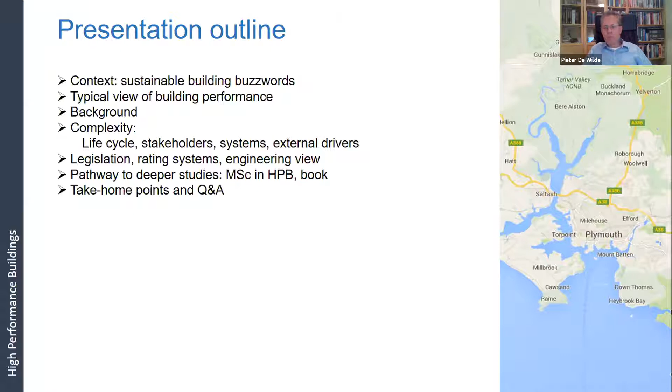I will then make a distinction between legislation, rating systems, and what I call the engineering view, and give you some pointers to work we do at the university, and pathways if you want to know more about these things, where you can learn about them. I'll end up with take-home points and open up the Q&A. So, set you in the scene for the bit there.

But then we come across a range of other names. Things like eco buildings, passive house, zero energy house, or plus energy house, or we can talk about net zero emission or net zero carbon, autarkic house. Then we have the BREEAM and the LEED certified buildings, green buildings, sustainable buildings. It is a very long list.

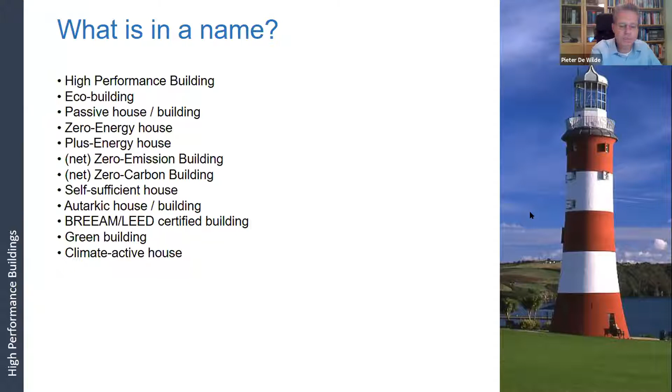And all these things imply specific focus areas. There's quite a bit of uncertainty often amongst my students about what is what and how we draw the boundaries between those things. So if we talk about high performance buildings and building performance, the dominant view seems to be one that somehow relates to sustainability, energy efficiency, and thermal comfort.

So things like daylighting, natural ventilation, use of renewable sources, water conservation. And because it's an American building, it's all normalized into US dollars, and what they're proud of here is an energy cost that is $0 per square foot. So that is something we see a lot when we talk about building performance.

If we have the discussion within our groups at CIBSE or at the university, a lot of that boils down to energy efficiency and things like the certification scheme. You all know these things that we see on white goods, but we also have them in buildings now, and we have long discussions about what the energy performance certificate is, what the display certificate is, and whether there's a gap between the two. So that is where a lot of the focus of our work goes. CIBSE also run a building performance award, and again it tends to focus in this area.

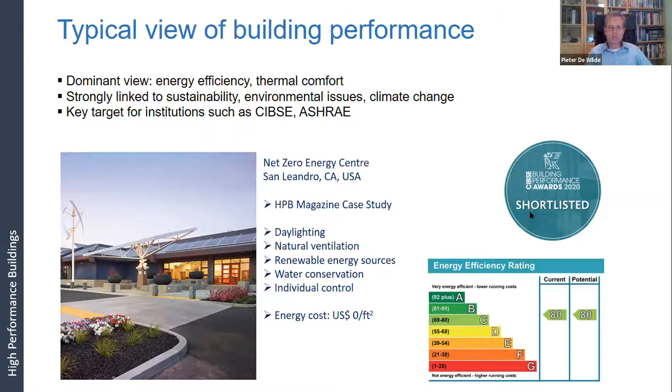If we look at the background of building performance, actually building performance has been in the interest of humanity for a much longer time. That's not a recent phenomenon. If you go to the very first buildings ever built, that is about creating shelter against the environment. People are interested in which building keeps you better dry or keeps the animals out more safely than another. So that has always been in there. But originally all of that goes into a concept where architects and other people work together—the concept of the master builder, one person in charge of everything. We have this evolution of design and the craft of building houses over the years, and performance is part of that.

Performance actually comes to a specific realm of its own already very early on. If you look at the timeline of performance, very early on you have the Hammurabi Code, 1700 years before Christ in Babylon, where there's a law that says if a builder constructs a building and that building falls down and kills the occupants, then that builder shall be put to death. A very strong statement about building performance, what the building has to do, and also the very harsh consequences if you fail to meet that performance standard.

So that's a warning—if we complain about Part L regulation, it's been worse in the past.

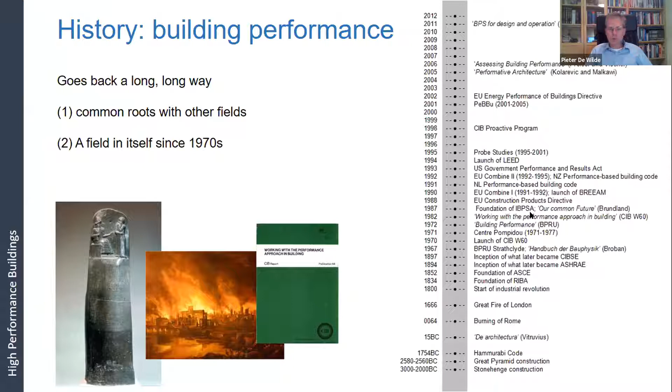Like I said, the initial take of most people is to say building performance is strongly related to energy, thermal comfort, maybe a bit of structural lighting, ventilation. But one of the things I really try to champion with my students over the years is that there's many more. I did quite intensive research on what aspects are in there.

I can reach behind me and grab my thick book that I wrote on building performance. One of the things you find in that book is an appendix that lists almost 80 different things we should be looking at when we talk about buildings. For instance, olfactory comfort—what you smell in the building—or burglary protection, or how you find your way in the building, or how you keep vermin or pests out of the building. All these are things we can measure that actually have to do with the performance of buildings, so we should not forget those.

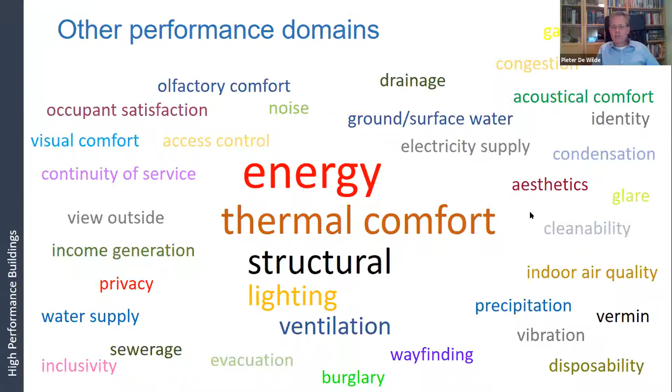But all of this also brings us to quite a bit of complexity. One of the first things is you have so many aspects on the table, and it's like a spider's web—if you pull on one side, everything starts to move and everything is interconnected. If you make buildings more energy efficient, that might have consequences for the fire safety on the other end. If we think of Grenfell, an effort to make a building more sustainable and energy efficient later on had very nasty consequences for the safety of the occupants. In fact, that spider web—every string you touch is related to the others.

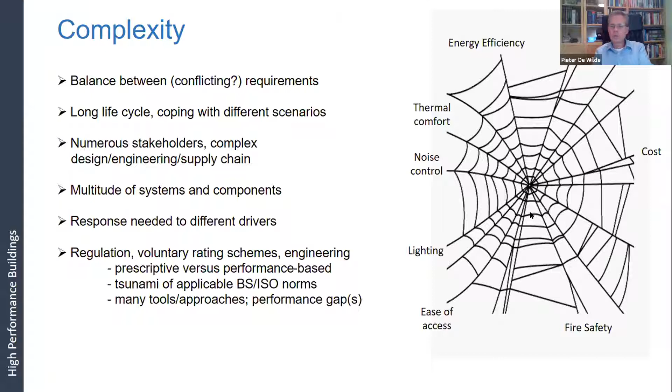Then we have to deal with other complexities, and I'll talk about that in the next couple of slides. We have a long life cycle, coping with different scenarios. We have very many stakeholders in the project, quite a lot of factors we try to respond to. And then we have these regulations, and we need to deal with those and make sure we handle them right.

So if you think about something like climate change and a warming situation, more extreme weather events, our buildings are likely to face that, and that makes our design, our engineering more complex.

We also have to take into account that if we try to do that engineering and design for the future, we have to deal with things like facility management, renovation and retrofit. These are all things that happen throughout that long lifetime, but also are hard to predict. It's very hard to say right now, if you build a building, let's say on the university campus, how good the facility management will be in 20 years down the line. When can we expect the renovation? When can we expect the retrofit and a new heating system to be brought in? It makes it difficult to do our job.

At the same time, the high performance building of Stonehenge - I like to show that to my students and challenge them to say, okay, you design a building that is supposed to last for 3,000 years, and you design a system to bring in stones from Wales to make a monument in Wiltshire, and actually have something related to where the solar position is. That is a nice challenge.

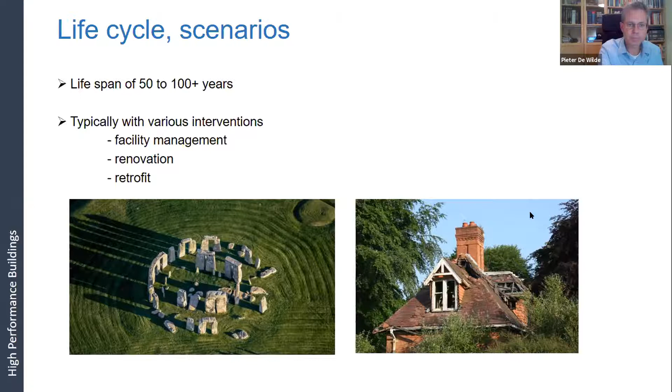Then we have the complexity of the stakeholders. There's a lot to be said about the different people involved. And if you work in the industry, like probably most people on this call today do, we have to deal with a whole range of people - the client, the design team, the contractor, the occupants later on in the building. That is already complex, and we need to take care of all of them and make sure there's good communication.

But if we start thinking in more detail about that, you start to realize that for a building like a university building, the tenant is actually an organization with a whole range of people in there. There's a dean, a head of school, a head of department, a secretary, a large number of staff, a large number of students. That becomes a complex organization in itself. And the communication from that organization with, let's say, the architect and the engineers who develop the new building is a specialty in itself. There's also risks in this.

The more you read about that and follow the news, the more you see that stereotyping is something difficult, and that happens all the time. Especially if we say, well, this is the way an architect thinks, this is the way an engineer thinks - then actually we're kind of fooling ourselves and often making mistakes.

An example I like to talk to my students about is, for instance, Calatrava, who's done some very nice building design. I like the railway station in Liège in Belgium, which he designed. It's really on the interface between structural engineering, architecture, and actually, in a way, sculpture in itself. So all those boundaries then become difficult, and we need to look into that.

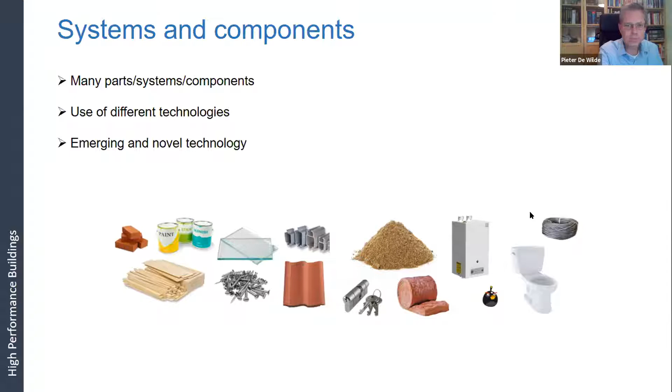Then we have our external drivers. And I've had for a long time discussions with colleagues where I remember some heated debates that climate change was seen to be the major driver that we need to respond to. And in a way, that is true. But in another way, it's not true.

So the current situation with the pandemic suddenly puts climate change into a different category, and everybody's now focusing on how we cope with COVID-19 in our buildings. Might be if the vaccine works that we can go back to worrying about climate change. There's also people that actually see some connection between what we do to the wider environment and the emergence of things like COVID, but it's a different challenge for buildings. I like to point at some other of the challenges that we have in there.

So climate change, warming situation, and more extreme events is something that I researched in the past, and that's definitely an important one to look at. But there's other stuff, yeah? So for instance, peak oil. If we keep using fossil fuels, then long before we get out of fossil fuels and we don't have any left, the price goes up. And that is an effect that we will see much earlier than us running out of fossil fuels.

One to think about. Clean water is becoming more and more of a problem. University has done quite a bit of work on microplastics in water and all the health effects that might have. Yeah, it's another one to worry about. And what the construction does in that sense is something that we should explore.

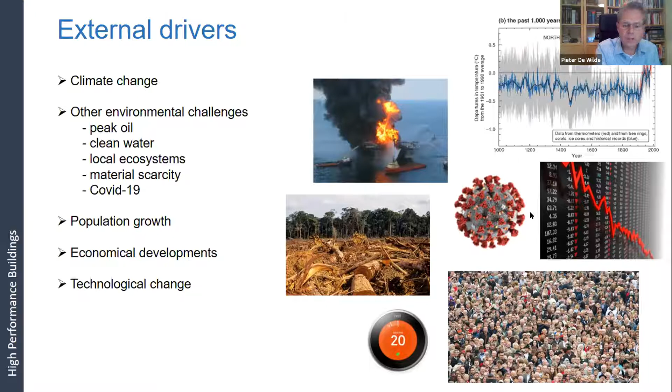Now, if we then take that into how that sits in the industry, and hopefully the next two speakers will follow up on some of this. But we start, of course, with building regulations, where the government tells us that every building needs at least a certain lowest level of performance. What is interesting if you look at building regulations is that originally building regulations gave a list of solutions. So if you were to build in a certain way, if you make a detail as specified by the government, you are okay to build.

In the 1980s, there was quite a bit of discussion where people wanted to move from what is called prescriptive regulations to performance-based regulations. Performance-based regulations lets go of saying this is the good solution, if you do this, you're okay. It just says if you build a building, for instance, you should make sure that your energy use per square meter is not higher than a certain threshold. And how you actually achieve that, we leave completely open to the designer. As long as you meet the performance, you're good.

That was interesting, and there was a lot of work, for instance, in the CIB, the International Building Society, to get that to be adopted across the world. But then you find out that for some areas, it doesn't work as easy as that. So the full swing to completely performance-based regulation has never happened. What you see in practice is typically a mix where some of the regulation, like the energy efficiency, is performance-based, but there's other areas where we still prescribe solutions because that works.

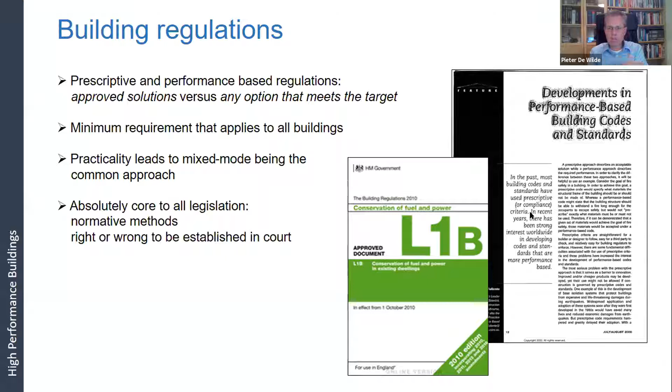One thing to keep in mind if you talk about regulation is that regulation is something that needs to stand up in court. So this needs to be a black and white approach. You need to be able to say, if you designed the building, did it meet the regulations, yes or no? And you go back to an example like Grenfell Tower. People at the moment can go into court and you can say, can we blame the architect? Did he do a good design? Can we blame the consultant? Did they do a good job? How about the contractor? Did they meet the specifications? It needs to be black and white. And that is what's always there in a legal context.

One of the things you get into if you look at all these legal documents is also, it is something that does your head in. So I'm a professor in building performance analysis. It's my job to look at these things. So one of the things I did about a year ago was go into the university system and download all the building norms that I could get my hands on. And we have a system called the Construction Information Service, where you can get all the British standard, European and ISO norms and download them to your machine, and you can start reading.

I never got much further than making a spreadsheet that has the names and the codes of these norms. And then, well, as you see, this screen ends at 1200 something, and that's just in the middle of my spreadsheet. There's a long, long range of codes and norms that applies to buildings. So actually getting all of that to be integrated in a design and meeting all those regulations that are out there, that is a really steep uphill challenge.

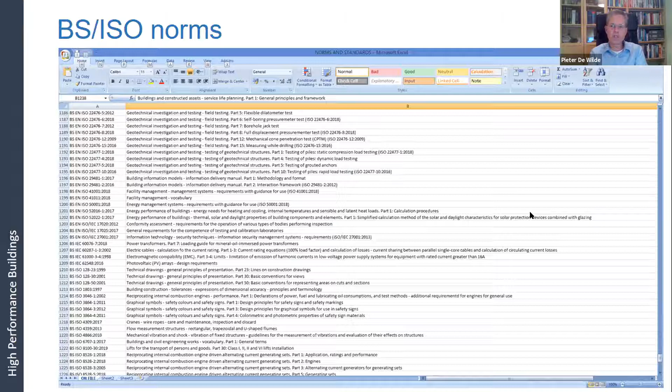Then beyond that, we have voluntary rating schemes. So you might all know BREEAM, the Building Research Establishment Environmental Assessment Method, but there's others around there, right? So the US has LEED, we have Passivhaus. I think there's a talk on Passivhaus later on. One of the new kids on the block is WELL, which is more on the health effect, but we've got things from further afield. So we have in Qatar the GSAS system, the Global Sustainability Assessment System. We have CASBEE in Japan. We have Minergie in Switzerland. We have NABERS in Australia, and that list goes on.

Typically, those voluntary rating schemes, they're really driven by the industry, and they help to increase sales and prestige. Yeah? So if you can say my building is LEED Gold certified or LEED Platinum or BREEAM Excellent, that is an argument that allows you to set the building into the market and claim some brownie points.

If you look in more detail in how you achieve that rating, then typically all those rating schemes are based on gaining some points, getting some credits. And some of those credits are related to performance, but there might also be points for things that are actually not related to building performance. And that is where things start to diverge from what, in my perception, is a high performance building.

So for instance, you can, in many schemes, get extra points for using a certified assessor in your design process. That says something about the process, but not about the building. Sometimes you can get credits for being close to the railway station, for having a bicycle shed. That's not necessarily a building performance thing. That's just something that you can score, right?

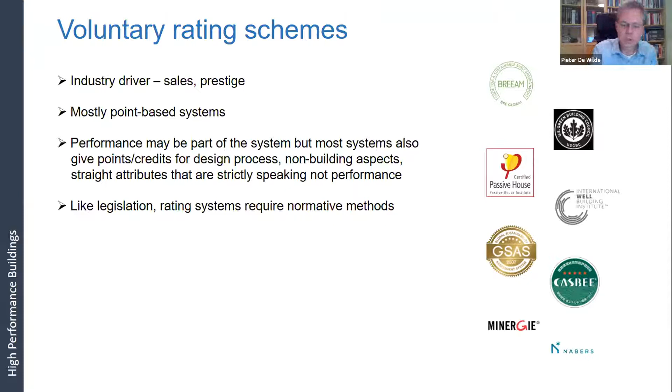Then we have the engineering perspective. And if we do engineering, then typically we are aware that there's uncertainties and we predict things, but typically with an error margin. This also leads us to wanting to say, well, all these aspects, so Peter, you talk about 80 different performance aspects. How do we handle that?

Well, the first thing is that we need to be able to measure it. Yeah, so we have the quotation of our famous Lord Kelvin in here. If you cannot measure it, you cannot improve it. So if I want to do high performance, then first of all, I should measure performance and then be able to say, am I in the high performance bracket, yes or no?

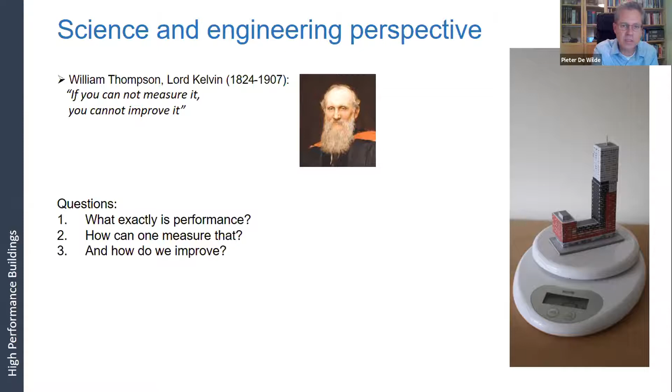But that leads us to further problems, because then we need to define performance, and that's not an easy one. We also need to talk about how we can measure it. And then we need to decide in a design process or a re-engineering process how we can improve the performance. Not easy things. If you're interested in that, I will just point to the masters we have where we talk a lot about these things. But here I will just keep it relatively simple.

And I will say, okay, performance is something that has to do with how well the building does the functions that it has. So it needs to be energy efficient. It needs to provide fire safety. And how well the building does that, we can actually measure with 4 main approaches. The first is the good old physical measurement. Think about Newton and the apple, and we measure how quickly it falls and what forces are in there. And we can use that on buildings as well and do measurements.

Problem we have is that buildings are large and expensive, and bringing a building into the lab is something that we actually only do for components, right? Nobody takes a full Grenfell Tower into a fire lab. Maybe a part of the facade, but not the whole thing. So for measurement, we're often looking at buildings in their context, but that means that we have not full control. So we don't have full control about the climate, we don't have full control about the occupants.

The second approach we have to quantify performance is computer simulation. That's where we build a good model in our nice computers that we all have, and we try to predict how performance would be, assuming that we make no errors in physics, the math, and in the coding. Yeah? If we do it all right, then we can actually look at all kinds of variants in the building, compare them under identical scenarios, which is great. And we can also predict performance of buildings that have not been designed yet, which is also a good thing.

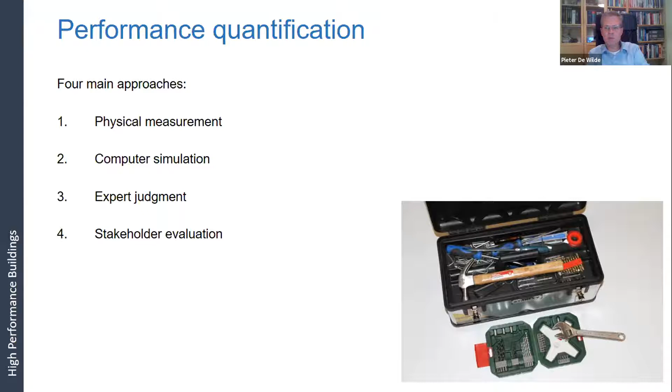But one of the problems we have there is that the judgment of people often is subjective and has noise in there. So when I ask my students whether their room is comfortable, if I do that in September when they just start the new lecture term and they're all excited and they're in a good mood and they just come from holiday, then we'll have a different perception than when I ask them at the end of term when the exam is near and they're all stressed out. The conditions in the room might be the same, but what they make of that building might be dependent on external stressors. So that is one of the complexities we have in that field.

So like I said, building performance, something we want to measure, but then what is high performance is where we actually take a building and compare that to other buildings, to the peers. Yeah, that's one of the things, but we also need to look at what experiment or what loading we have on that building. So the same building positioned in the relatively mild maritime climate of Plymouth, if I take that same building and put it in the top of Scandinavia where there's a much harder winter, then that same building will have to work harder to maintain a thermal comfort in the winter conditions. So we also need to take that into account.

If we look at how that building performs related to the peers, then that instantly also means that if we have high performance buildings, then we probably also have low performance buildings, something that is not so good. And we probably need to look at those. And there might also be a middle group of regularly performing buildings. Where you actually draw those lines is something that has not been debated in industry as far as I can find. But you can have a discussion whether high performance building is your top half, your top quarter, or just your top 10%. And that has to do with where we want to draw those boundaries.

It's also at odds with things like rating systems, because in a rating system, in theory, once you've defined what a BREEAM Gold building is, all buildings in the world could do that and all be in line for a BREEAM Gold award. Then that would reduce the usefulness to the people that built those buildings. But because it's a normative system, once you've drawn the boundary, it's in or out. For high performance building, that is not defined that way.

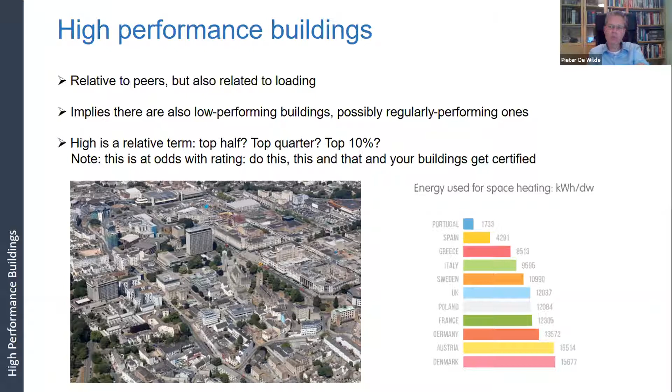At the university, we also do other stuff. We have an MSc that has exactly the title of my talk - Master in High Performance Buildings - that is accredited by CIBSE. So that's my CIBSE hat on, as well as my university hat.

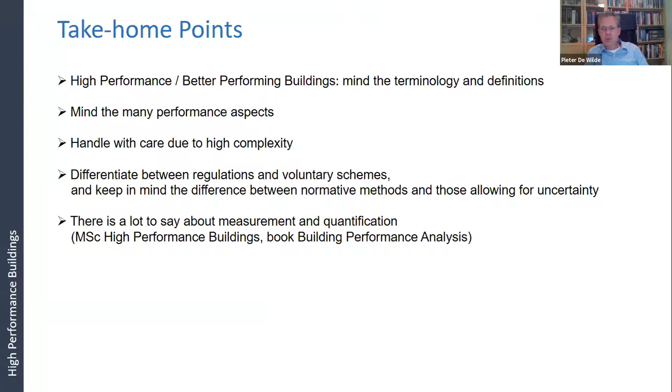I'm going to round up now, I see we've slightly overrun. A couple of things to keep in mind: with high performance buildings, mind the terminology and definitions, be careful especially if you use other terms. Mind the many performance aspects, handle the complexity, differentiate between regulations, voluntary schemes, and the engineering view, and keep in mind the normative aspects and those that allow handling uncertainty. There's a lot more to be said about these things - that's why we teach this at university level. I'll leave it at that and hand it back to Miles.

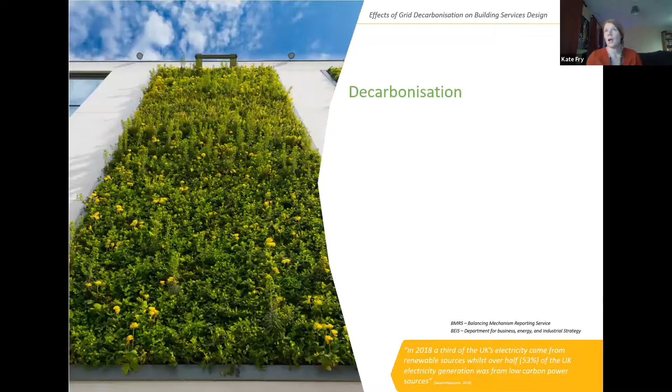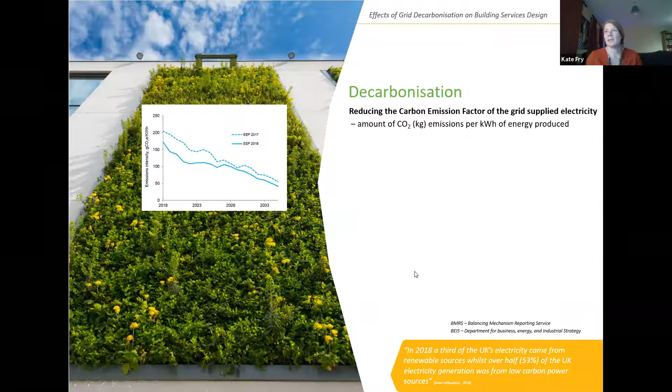What was really interesting this year is during the first COVID lockdown, from March to June, there was 0% coal usage feeding into the grid. That's the first time since forever that's happened. But we are unfortunately now back to using coal as demand has increased since the lockdown.

There are some other technologies being used in the grid: pumped storage, interconnectors, which is essentially energy from abroad, and carbon capture, which is a big buzzword at the moment, which essentially is capturing that CO2 so it doesn't go to atmosphere, further decarbonising the grid.

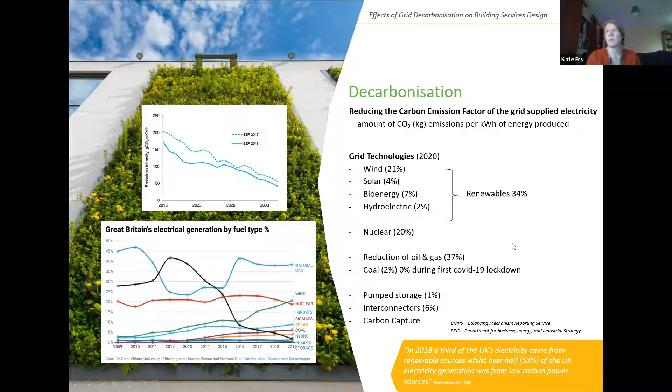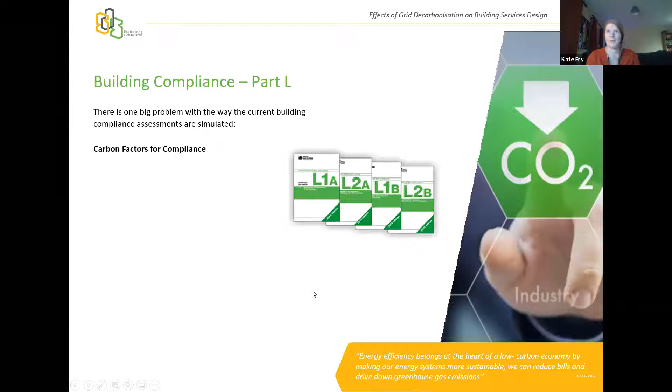I'm just going to head off from decarbonisation for a bit and talk about building compliance, Part L, which some of you might be very familiar with. There's one big problem with the way current building compliance assessments are simulated. We're using a document called SAP 2012, our current regulation, which was quite a long time ago.

As you can see here, the grid electricity carbon factor that we're using in SAP 2012 is 0.519. As we saw from the previous slide, this is actually more like 0.17. So there's a huge gap between what we should be using and what we are currently using.

However, SAP 2019, due to come out in spring 2021 — so only 2 years late, hopefully it does come out then — because the grid electricity carbon factor will then be going down, they've predicted, to 0.136. As you can see, this will change massively how we view gas and electricity in our buildings, and the way they affect the low carbonness of our buildings.

You also see that the mains gas carbon emission is dropping slightly, probably due to the increased efficiency on transmission.

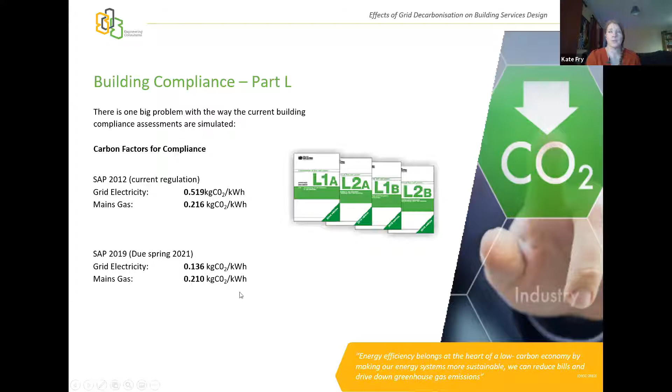I'm just going to talk a little bit about low carbon design and how we actually go through 3 steps for a low carbon design building.

Number 1 is fabric energy efficiency — reducing the energy demand in our building. This is very much a fabric first approach, which is what we like to do. Before we start adding any other technologies, we need to go for the passive design.

That's mostly done with insulation and reducing our air permeability, which I'm sure will be talked about in the Passivhaus talk a bit later on.

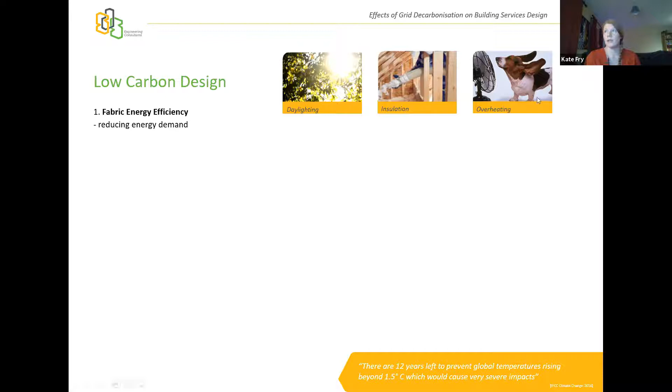But there are other items such as building orientation, using your daylighting, using solar gains, and using solar shading to actually reduce the energy demand of your building. This needs to be looked at a very early stage, stage 1, stage 2 RIBA, to try and get the building as low energy demand as possible.

Stage number 2 is putting in efficient system designs, reducing your energy consumption in the building. To do this, we're looking at BMS control systems to actually control what's going on in the building, making sure things aren't left on and everything's running as efficiently as possible. It's the design of efficient plant and the actual design of the systems to make sure the plant is running efficiently.

Luminaire selection is obviously a big thing happening in a lot of buildings at the moment — phasing out the fluorescents and getting the LEDs in, because yet again, it's reducing your energy consumption.

Low and zero carbon technologies — this is what might be changing with our grid decarbonisation. The lower the carbon emissions are on the grid, the more it will affect what technologies we're putting onto our buildings. I've highlighted 3 here: biomass, district heating, and solar hot water.

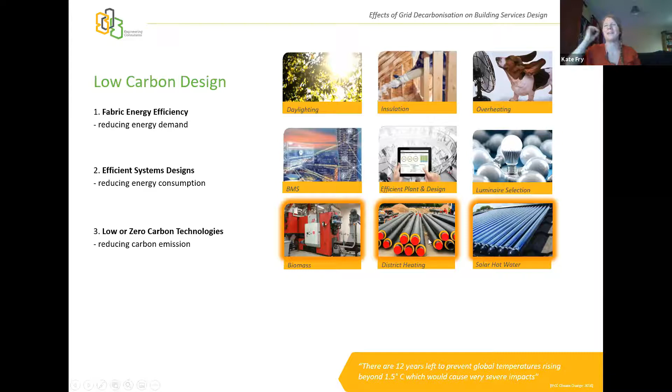I've highlighted these in orange because these are unlikely to be too affected by the change in grid emissions, because they don't use electricity and they don't use gas. District heating is a tricky one to have on there, because district heating obviously depends on the source of the heating and not actually the district system itself.

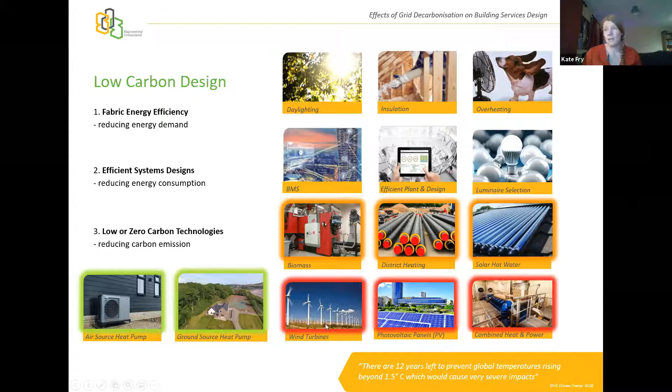The technologies that will really benefit from the grid decarbonisation are air source heat pumps, ground source heat pumps. There's also marine source heat pumps, open water source heat pumps — lots going on there. And these will benefit because they use electricity, either from the grid or from your generating electricity products, to then create heat.

When you see that grid decarbonisation is happening and that electricity will have a much lower carbon emission, the first thought is: now we can install direct electric heating in all our houses. It's very low capital cost, it's easy to design, and easy to install. However, there are two big reasons why direct electric heating, such as just radiators stuck on the wall, is not the way forward.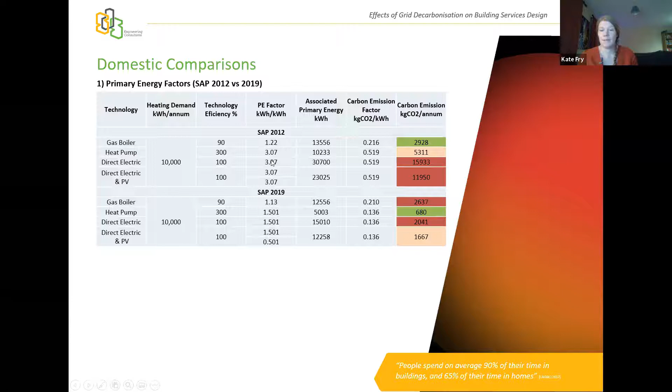The reason we can't just put direct electric in is because of this PE factor. The other reason is cost. Grid electricity is still over three times more expensive than mains gas, and this does not show any signs of reducing over the next few years—in fact, it may even go further up. This is a big problem, because although electricity has got lower carbon, the price isn't changing, so people just aren't seeing the benefits of putting it in.

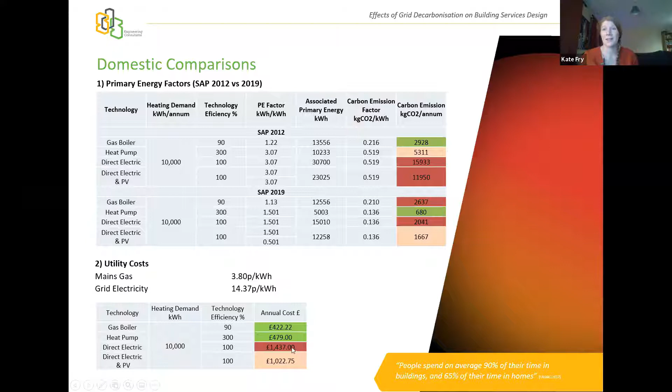Going back a slide, the benefits there are: you see heat pumps massively going down in price in terms of running costs, but gas boilers are still going to be cheaper to run, even with the upcoming changes. Direct electricity heating costs an absolute fortune, and this is why we tend to stay away from it in any building designs we put in.

Limitations—I'm going to cover firstly the limitations of Part L compliance. The first one is the carbon emission factors, which is what we've been talking about. The accuracy and source of these at the moment are not up to date, so we're not getting accurate compliance modelling being done.

The next one is unregulated emissions. Basically, what I'm saying here is Part L does not account for process systems—it doesn't account for kitchens, industrial loads, any plug-in electrical requirements, and servers.

The next one is building profiles—how buildings are actually utilised compared to their simulations. In this graph in the middle, what we can see is a Part L model, what it's measuring from a consumption perspective, versus what is actually happening in the building when measured on site. There's a huge difference in the electrical loads here—the cooling, the fans, and the lighting—there's a massive gap between what is being modelled and what is actually happening on site. And as I said with unregulated emissions, these ones on top aren't even included in the Part L model.

So the Part L model really isn't allowing for quite a large amount of the energy usage in our buildings. The last two on here, which were actually discussed in the last set of Future Plymouth presentations, are embodied carbon and construction carbon, which just aren't included in the Part L simulation at all.

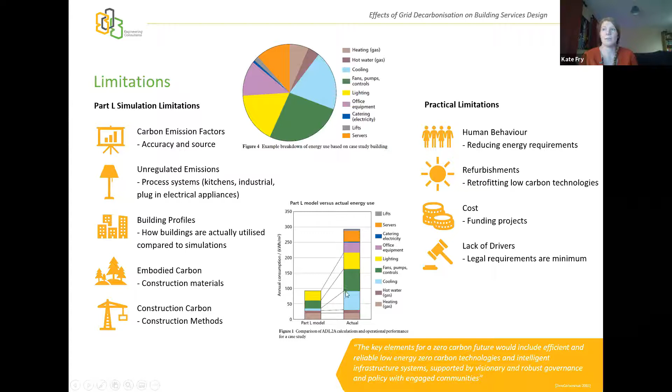And this is the big one, and I think this is what we've all been covering in these Future Plymouth talks: it's just the massive lack of drivers. The legal requirements are minimum. As I said, Part L is our legal requirement, and it's not even accounting for huge amounts of energy being used in buildings.

So that was a bit negative. I'm going to end on hopefully a bit more of a positive note here.

Starting off with this green industrial revolution, which is the points that the government came out with in November. I've highlighted 3 of those in green, and this is all to do with grid decarbonisation. Further decarbonisation is happening with more offshore wind, advancing nuclear as a clean energy source, and developing carbon capture technology, which is fantastic because the lower that gets, the less we have to worry about the way we're using it.

In our homes and commercial buildings, the 3 that I've highlighted in orange are still to do with buildings, but a little bit more specific. I'll come back to number 2. Number 7 here is making our homes and public buildings warmer and more energy efficient, with a target to install quite a large amount of heat pumps every year by 2028, which is fantastic. But until that SAP changes, it might be quite difficult to get the compliance there.

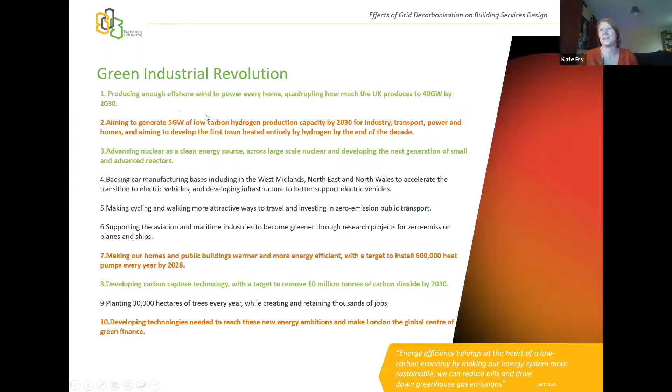Developing technologies, making London the global centre of green finance, so it all kind of plugs in together. Number 2 is really interesting, and this is the use of low carbon hydrogen production and using that in houses. They have been talking about this for many years, and as to whether it will actually happen and can actually be feasible is a completely different presentation on a completely different day, but it is very interesting and something to look into.

I'm just going to finish here on zero carbon in use. So the building physics guys in our office have done a little simulation to see how it's actually feasible to get to this zero carbon in use. It's just a standard modelled community building here, and this is the building emission rate of the building, just as a notional build.

And then they've improved the building fabric, which is the first thing we'd be looking at: the orientation, how much glazing there is. As you can see, this is a pretty huge drop in the carbon emission rate just there. The next thing we'd look at is the energy efficiency of the services and the design of that, and that drops it down even further to 12.5.

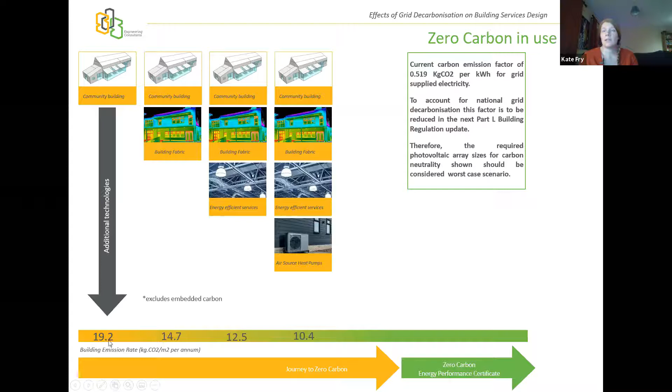The next thing that was done here was to put air source heat pumps on the building, which again dropped it further, but it is worth noting that the biggest drop here is those passive designs, and everything you do at the beginning of the building design is very key to the rest of the design.

And the last thing you would do to get to your zero carbon in use is you could put some kind of electrical generating technology on to then feed the air source heat pumps, which then feeds the rest of the building. It's a nice cycle where you're not having to bring anything in from the outside, from the grid or the national gas. And then you can increase the amount of PV to get to the zero carbon and the energy performance certificate.

What is worth noting here is, with the decarbonisation of the grid - because this is all based on the current factors we're using - with the decarbonisation of the grid, the amount of photovoltaic panels required to get to net zero will be heavily reduced. So it should become a lot cheaper and a lot easier to develop zero carbon buildings as the grid becomes more and more decarbonised. That's a pretty positive thing.

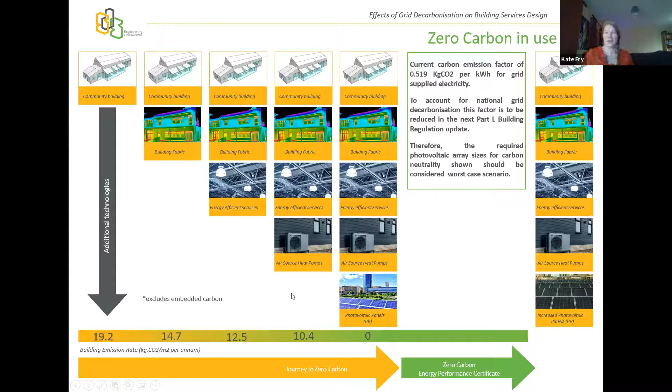And I'm just going to end on that kind of positive note there. Thank you. Thank you very much, Miles.

There we are. Right. Miles, are we there with a full screen? There we are. Just might need to share your screen, Andrew, yeah. Oh, I think, sorry. Share, there we are. Got my face on it the whole time. Right. There we are. Is that showing, Miles? Brilliant, yeah, that's fine. Great stuff, thank you very much. Yeah, thank you very much.

My name's Andrew Ash, and I work for Kier Construction. And just with the question that got put on the chat a minute ago, just be mindful that my last job was Beckley Point. So just be mindful of what your comments are on that one. So please be nice. We had our challenges there.

So yeah, I'm here to talk about the Passivhaus building and the construction of Passivhaus. This is my second Passivhaus building that I've been part of. I've gone from one extreme to the other. My first was a 3-bed Passivhaus at South Devon College, which was used as a trial building. And then my second one is now the Passivhaus building at St Sidwell's Point, which will actually be the first building of its type in the UK.

It's the third ever swimming pool that has been constructed. Two were originally constructed in Germany. One was a new build and one was a refurb. And I'm claiming this is actually probably a world's first because we've got both the wet side of the swimming pool and also the dry side.

So what we're going to go through in the talk is an overview of the project, what is Passivhaus, and what we felt the base for success for achieving that would be, the progress to date with a few photos, how do we get the project team to succeed, the quality, culture change, so the sample mock-up we produced, airtightness, which has been talked about a couple of times, massively key to this project and quite scarily small on this one, which I'll talk about in a bit, the accreditation and also any program implications that people think with Passivhaus there might be.

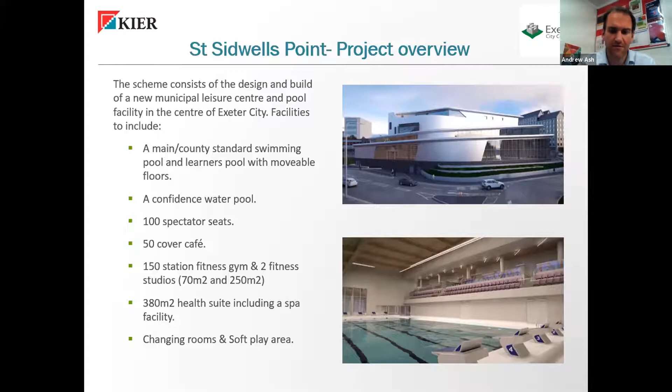Over the years, we've sort of moved away from maybe the 100% quality side of it, just because it's been pushed on program, on time, on monetary budget, things like that. Whereas this really gets back to a strong base of quality. So that's the project as it stands at the moment.

So then, what is Passivhaus? That statement there I've taken off the Passivhaus Institute in Germany's website. It really gives you a good idea of what Passivhaus is. It's really the high level of occupant comfort. When you've been inside a Passivhaus building, it's a completely different feeling inside with triple glazing. With no air movement, it's a really calm, very steady environment to be inside of.

It's very good for school environments, things like that, because of the quality of the air that's in there. It's an absolutely wonderful place to be. But one of the biggest outputs, as you can see there, is the reduction in energy usage. There's an example there of heating per unit of floor area, and you can see Passivhaus right down at 15 compared to 150 for a modern sort of unit, which for the council not only means they're using less energy, obviously it costs them quite a lot less. So yeah, another benefit for the client.

But as we said, it needs to be a client that buys into this, because if you're a developer that's going to build, I don't know, a set of student accommodation with a view in 3 to 5 years to then sell it on, the cost of this would maybe make that not as attractive. But if, like Exeter City, you're building a building that you want to be climate resilient until 2080, this is exactly where you should be.

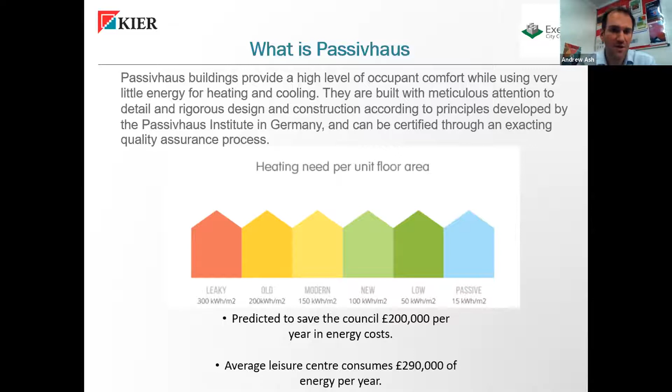It's simple things. We ran workshops right at the beginning of the project to help with the design, and the designers actually had to use air tape, trying to tape a pipe that was really close to the ceiling, so they understood how difficult it was to do. So then we can look at the design of what we're putting together and move that block of pipes or whatever it might be away from a wall or a ceiling, to give someone an opportunity to get in there and install the air tape, the fire batt, whatever it might be, with every opportunity to do it correctly, not setting them up to fail because they physically couldn't get in there in the first place.

A couple of pictures on site at the moment. Obviously it's dark all the time, dark at night and dark in the morning at the moment, but that's a couple of pictures of the outside of the building and facade. The red material on the outside is a self-adhesive Wraptite air line. Something that's really important through the project is to understand where your airline is, and I'll talk a little bit more about that later on. You can see the quality of what we're trying to install there. It's clean, it's crisp, all the lines look good. That gives you some confidence you're setting off in the right direction.

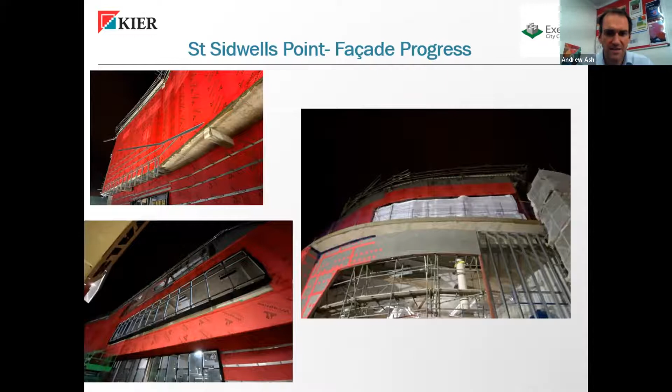And as you can see, Passivhaus hasn't really changed the design of the building. We have a lead architect, FaulknerBrowns, who are an architect for sports facilities and leisure centres. And then we also have Gale and Snowden, who sit underneath our lead consultant as the Passivhaus architects. And they work in tandem really well. They've worked together so well as a team to create this really stunning looking building.

Internally inside of the building, I did mention we've got the swimming pool side of it. We've actually got a system called microfiltration, which is in that picture on the top left-hand side. As opposed to having sand filtration to clean the water, it's microfiltration, where water is pushed through ceramic discs at high pressure.

So that was a battle that we had with the energy usage of pushing high pressure water through, obviously more energy usage, bigger motors, which was detrimental to the Passivhaus side of it. So we had to then look at other energy saving elsewhere to mitigate that. But because it's a swimming pool, we wanted the quality of the water to be absolutely spot on, which is what the microfiltration gives you.

Just a stat, on average, a child in a swimming pool lesson will drink about a pint of water. So with our current swimming pools that are heavily chlorinated with chemicals, you can imagine the children drinking that, and also people with breathing issues, asthma, that's the word I was looking for, thank you. There's a layer of chemicals above the water, whereas with the microfiltration, you use a lot less chemicals, so it's actually cleaner, nicer water for everyone to swim in. So that was a balance with the Passivhaus and energy usage.

Otherwise, in there, you can see we've got some fantastic glulam beam structure. That's the underside of the swimming pools. And also the learner swimming pool there, the smaller swimming pool, we started to do the rendering and tiling. So the project's moving on nicely.

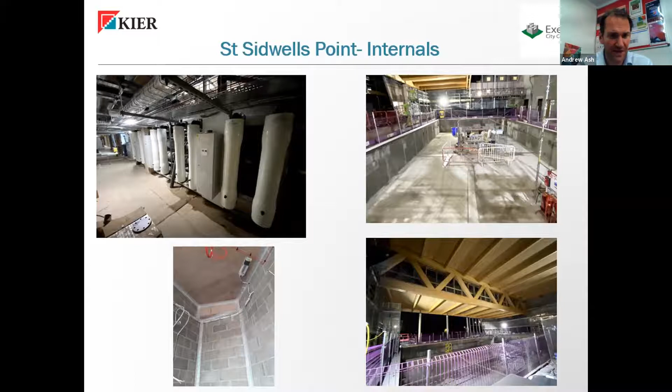So in regards to success for the project team, early engagement's really, really important. So we ran, like I say, design workshops, which were absolutely fantastic. Really good answers and really good questions came out of that early engagement and design with the designers. We were lucky with this project. Well, I say lucky, it was well managed. We had a two-stage tender.

So we had the opportunity within that to sit down with our key supply chain members that are relevant for the air tightness and Passivhaus, and work with them to demystify what Passivhaus meant to them. This meant that they weren't going to put a risk pot of money against what Passivhaus meant. We made sure they understood exactly what they need to do and what their requirements are. And if they achieve that, we will achieve Passivhaus. And that was again a really well-planned set of meetings that everyone then got buy-in. And then all of a sudden we started to become a team because everyone was talking about it.

Yeah, the selection of design is based on relevant experience and competency. There's lots of passive houses being built, and we've got some really good supply chain down here with relevant experience and competency. But we felt we needed to do a few more training sessions to get everyone up to speed on the same page, because people do have different relevant experiences, and also throw in the leisure centre side of it. Again, people have got different experiences with that. So we created as level a playing field as we could.

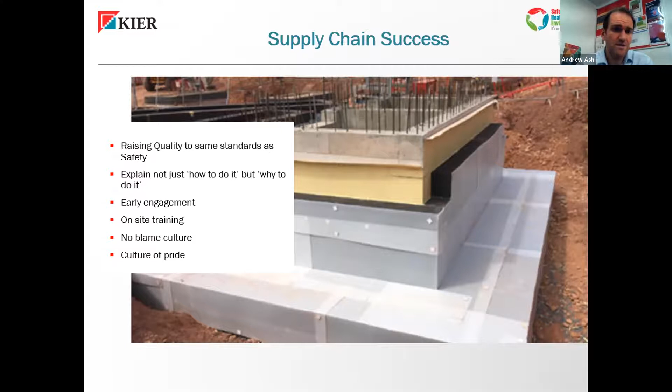So to help with the education side, not just for our design team but also for our supply chain, we ran a series of inductions for each of the trades. We called it a passive house passport. So we ran one specifically for the groundworks, so they can understand where they were. We've just recently done a building envelope induction. So again, they all have the base of passive house to understand what it's about, but we then go into a little bit more detail for the specifics of each trade or area.

And then this is one of the outputs from it. Again, it's the same picture because it's one of my favourite pictures of the lift. But it's the groundwork supervisor or manager putting that on with pride. And I think there were thousands and thousands of comments and well dones on quality and attention to detail. And that's been a really good output.

And one of the other words we use from this is a ripple effect. So they now know, as a subcontractor, as a supply chain, as an operative, how to install insulation to the highest of qualities. So they'll take that to a non-passive house site and apply the same. And for me, that's what I've done with Passive House when I did my Passive House in 2006, or whenever it was, maybe later. I've taken those things to other projects as well. So it is a really good ripple effect and upskilling of everyone.

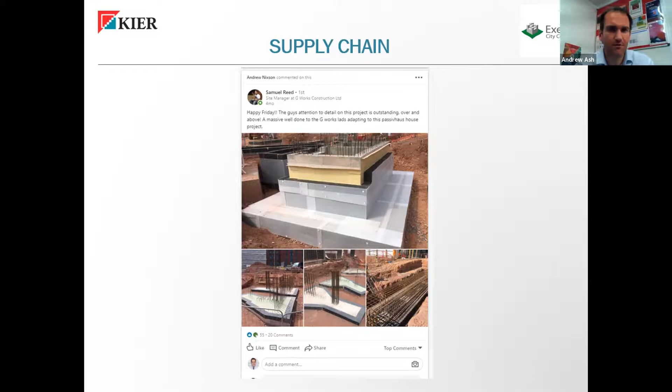Ask anyone about health and safety, say can you give me a risk assessment method statement, no problem at all, they all understand that. So that's where we mentioned before about getting the quality and the safety on the same par of understanding. We're in that place now with understanding of how to produce check sheets, inspection and test plans, and what they mean.

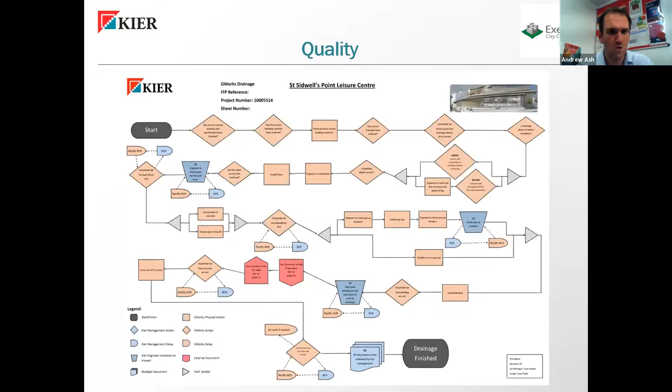You're putting, like back in the day, when you go up into a roof of an old building and the carpenter's chiseled his name in the eave sort of thing, we've kind of tried to do that a little bit with the QA acceptance thing. So when they've completed their work, the subcontractor who's been working on that elevation puts a sticker on, we come through and sign it off. Just to get that pride that they've been part of it, they put their name to it, they've actually signed that they're happy to pass that over as a completed part of the building.

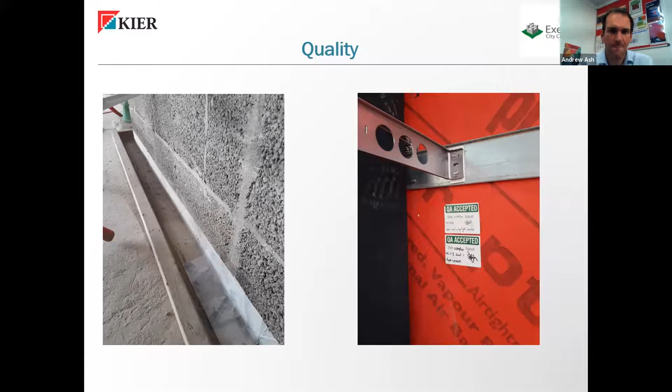So one of the things we did on site, which we've got so much out of, is we created a mock-up panel, 3 meters by 3 meter mock-up panel, which we actually air tested. So we've done our first air test on the building makeup. What was quite interesting, there was some Passivhaus accredited parts that weren't as airtight as we maybe thought they might be. So we've gone back and got them rejigged and changed.

We could have a look at if the lads, or if an operative doesn't put the screws in exactly straight to the material, or they drill one out, or they put one at a bit of an angle, what does that mean for our air tightness? If they do that 100 times over our facade, would that mean our air tightness would fail? What capacity have we got? What capacity? What's our zero as a building? So is the design so good that the building is airtight, or does the design not quite work?

And this is a really good opportunity for us to get some education, lessons learned, all those kind of buzzwords, just to see what we were doing. And it meant that we weren't learning on site, we were learning in our mock-up zone before we've even started. So it gave us opportunity to throw some water on the wall. How does it stick? Does it work still? All these kind of things we could have a trial first. So that was one of the biggest things that I think was a benefit for us.

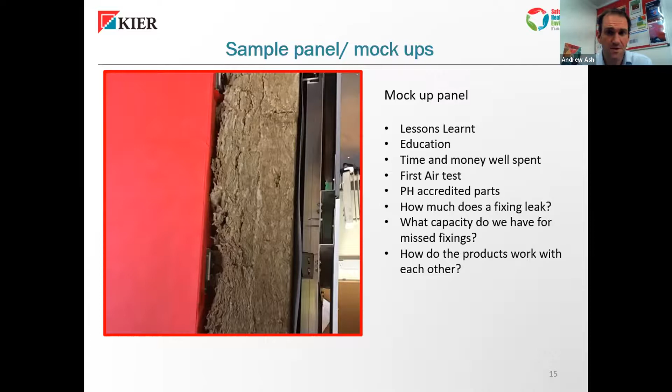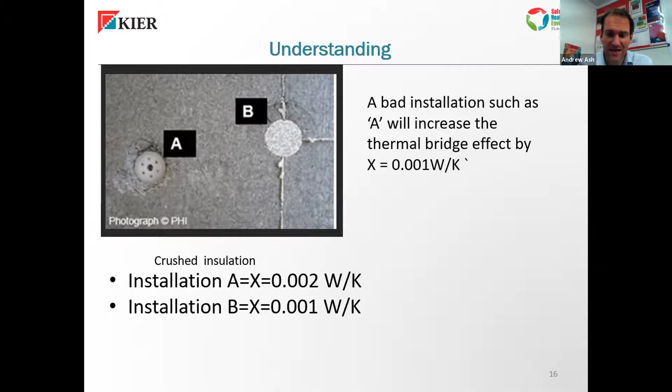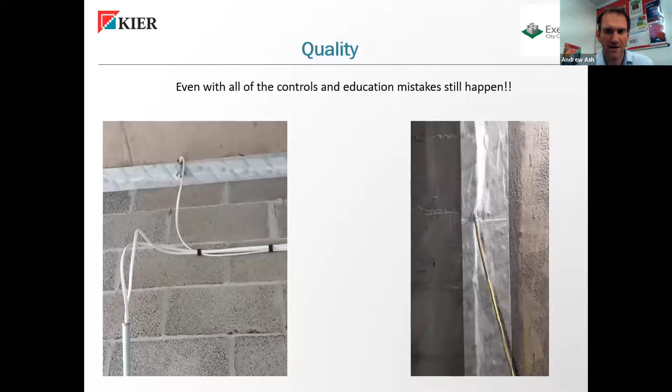And it's a no blame culture. We don't go around screaming at people and saying, what on earth are you doing? We try and educate them. So if they see a mistake somewhere else that someone else has done, they can talk to them about why you shouldn't do that, or if there's an error. So all of a sudden you've got going from having 12 Kier managers walking around site looking at quality, to 120 people walking around site understanding what you're trying to achieve and understanding the quality.

And it goes back to one of the points Kate made. We can build this thing perfectly, but as soon as you put humans involved in it, the doors get open, the windows get open, things get propped. So all of those lessons learned, we have to pass on to the end user to understand how to manage this building, how to manage the microfiltration, as well as the passive house side of it, the building biology side of it. So there's a lot of education we need to put in for the end user of this building.

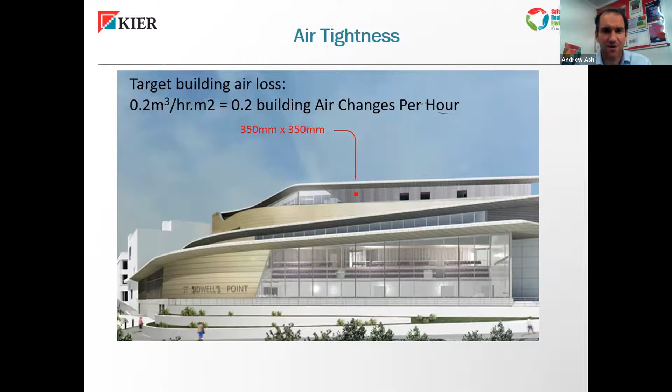But yeah, so you can see that tiny little red dot - that's the size, 350 millimeters by 350 millimeters. That is the amount of air leakage over that whole building's facade that equates to those figures. So yeah, really a fantastically technically accurate challenge for us to achieve.

I'll just move on to the Passivhaus Evidence Manager. It's probably worth talking about - we've got two specific roles in this project that are different from normal. One would be we have nominated an air tightness manager, and they manage the air tightness because it's such a critical part of achieving Passivhaus. And we've also got a Passivhaus Evidence Manager, and their role is literally, exactly as it says, to evidence manage all of the information. And there's quite a bit to get hold of, to be fair.

We've made a register so we can see where we are - a red, amber, green register. We've listed out every single photo we need to take, so we can just keep track of where we are, because obviously we don't want to go back and have to open up insulation if we don't have to, to show what we've installed.

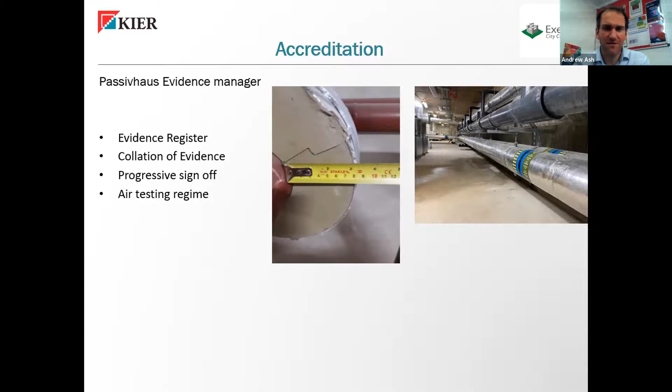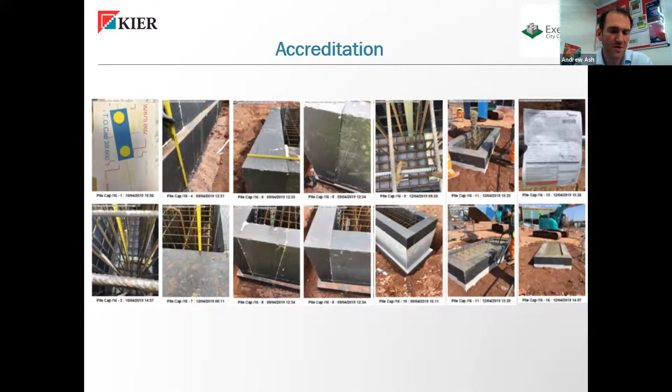So yeah, it's quite a beast, the evidence manager. But again, we should be doing this anyway. We should be evidencing that we've got the right insulation. We should be doing photos like this - it shows we've got the right thickness of insulation, in the right pile cap location, with the right type of rebar, with the right cement in there, and a nice finished picture at the end. We should be doing this anyway. There's nothing wrong, nothing different than we should be doing anyway. For various reasons, over time things get slightly diluted on it, but this is where we should be. And to be fair, we're really enjoying the quality output that we're producing here.

So I think I've got a few items on program here, because it's one thing that always gets picked up. It's one of those things for me - the program doesn't take longer, the program takes the right amount of time. What's happened over years is that programs and client pressure have squeezed our programs, not allowing us the suitable time to create inspection test plans, to have hold points, to understand it, to build it to the right quality, speed, time, with the right materials.

So yeah, there's nothing really, I think, wrong with the program. Yes, it adds time from what we'd expect normally, but this isn't a normal building. This is how it should be done almost. And you can't really squeeze a program - it's got to be done at the right time, at the right speed, inspected, tested, and checked. There's no two ways about it, really.

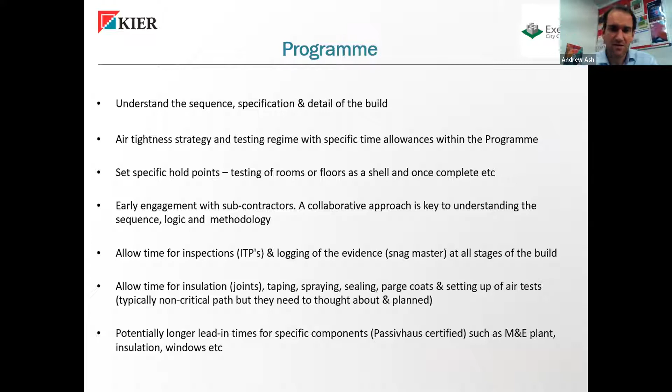So yeah, that's kind of really, for me, a bit of a chat over on that. It's quite a lot of information on site, and hopefully we'll be able to do a few more of these sort of presentations over time, but that's kind of a high level, quickly, what it's like to have a Passivhaus project.

Thank you very much, Andrew. That was really interesting, some great stuff there. Thank you, I look forward to seeing the building when it's done.

How far has it got to completion? We'll be completing in the summertime. At the moment we're getting the facade complete, with tiles going down. When we come back in the new year, we've got quite a large commissioning period because of the Passivhaus standard, and we have to be quite precious about that commissioning period, not to affect the Passivhaus side of it. It's a fairly stringent process, which is good, because it's done as it should be. Our building works will be complete, and then we test it. So we should be looking forward to swimming and using the gym and spa in the summer.

Nice, brilliant, thanks very much, Andrew. Not a problem.